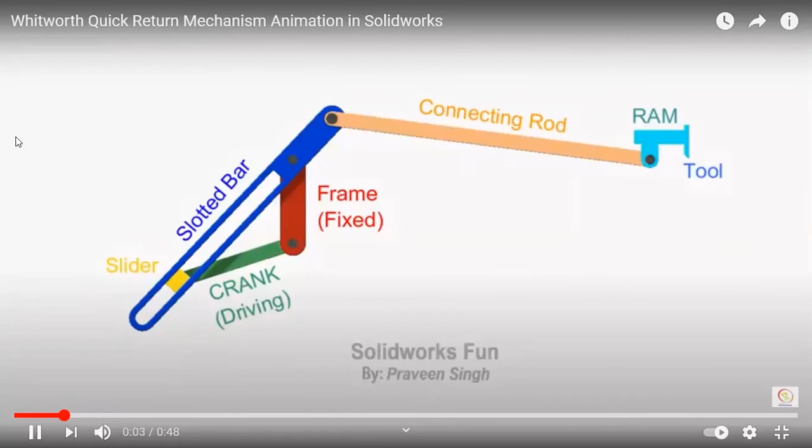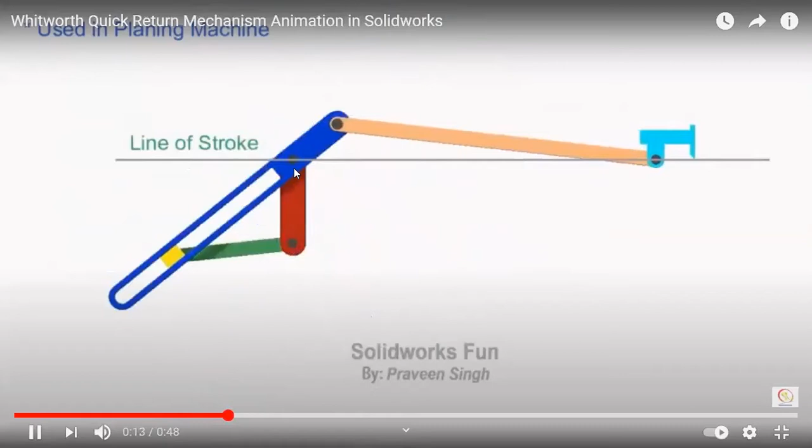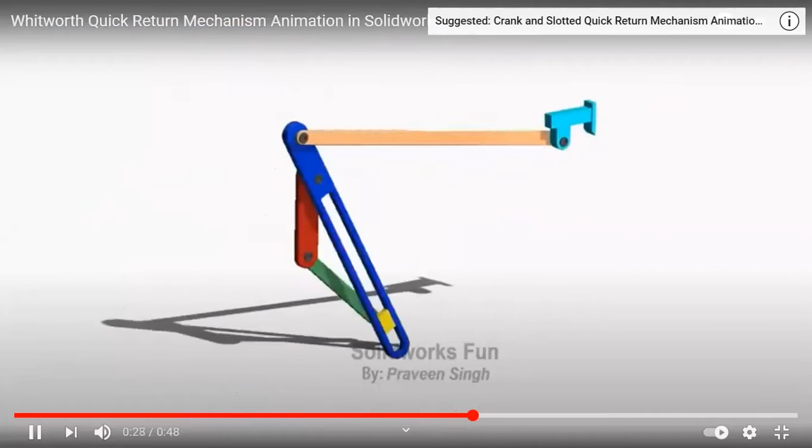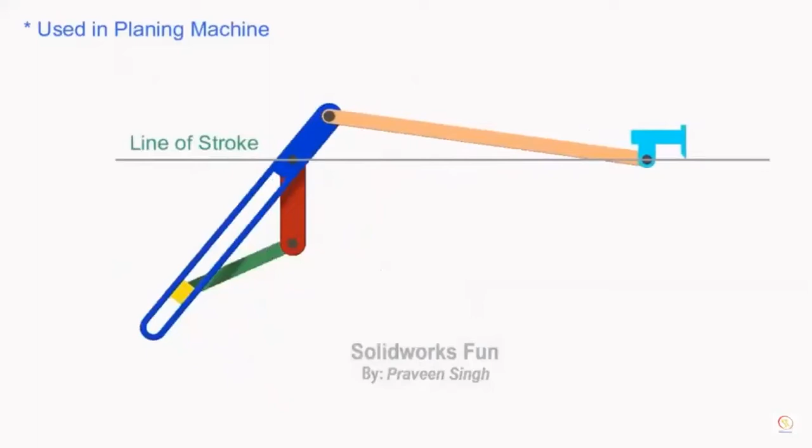You see how it's moving? The green one is the crank and the blue one is the slotted bar. When it moves forward, the tool is moving slowly, but when it comes back, it returns quickly. This is the specialized motion of the Whitworth quick return, that's why we call it a quick return mechanism. So we are going to study the kinematic diagram.

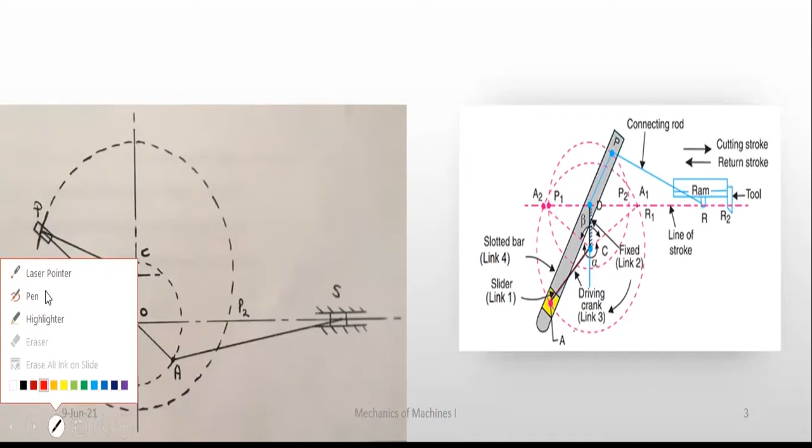On the right side, where my mouse is hovering, there are two pink circles, and on this side is the cutting tool. When the cutting tool moves in the right direction, we call it the cutting stroke. When the cutting tool moves in the left direction, we call it the return stroke. This is the connecting rod.

This is the connecting rod, and this one is the slotted link. Then the center C is the driving crank. This is the crank link. The gray one is the slotted link, and this one is the connecting rod. At the end of the crank, there is a piston moving along the slot. So this C is fixed.

C is fixed, and the slotted link is also fixed at point D. My red pointer shows D and C; these two points are fixed. On the left side of the figure, this one is C, similar to this C, and this O is the fixed D. Here they put D, but here they put O.

When the crank rotates at constant velocity, the end of the crank has to follow a path like this; there's no other way. Even though this piston moves along the slotted bar, it should move in a circle because the other end is fixed and it rotates at constant angular velocity. Also, point D is fixed.

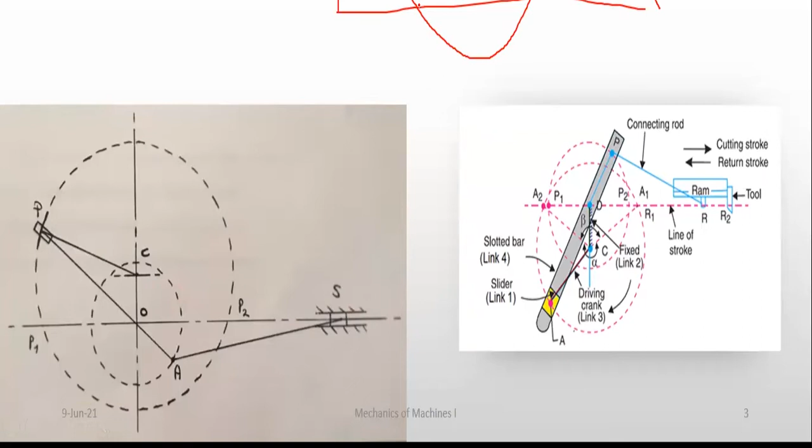Because of this special path, the piston also moves with this special motion. In the single slider crank, the velocity varies like this. For the Whitworth quick return, the forward stroke takes more time and the return is very quick.

This is the return. This is the forward. Because of this special arrangement of links, this piston is going to move like this. There's no equal time taken for the forward and reverse motion. The forward is going to take more time, the reverse is going to be less. That's why we use this specialized mechanism, the Whitworth quick return mechanism.

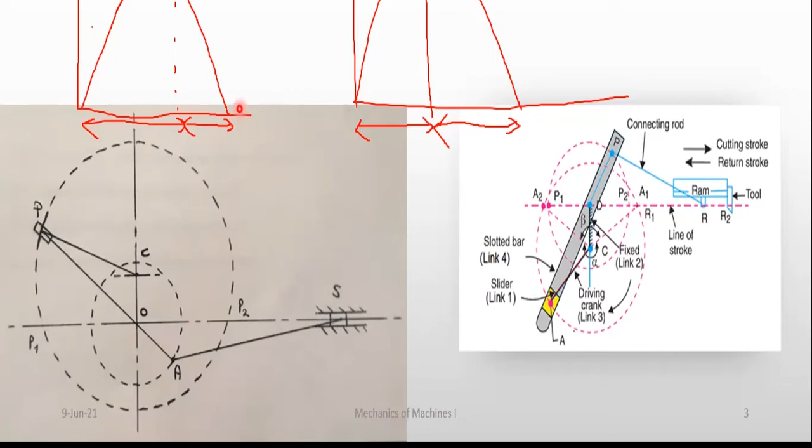This mechanism is mainly used in cutting tools. Normally when you cut metal or something, it's going to take more time. Then after cutting, it comes back to the original position quickly. Then again, it cuts slowly because you need some moderate speed to cut. You cannot cut the metal fast. So the forward takes a long time, and on return it quickly comes back.

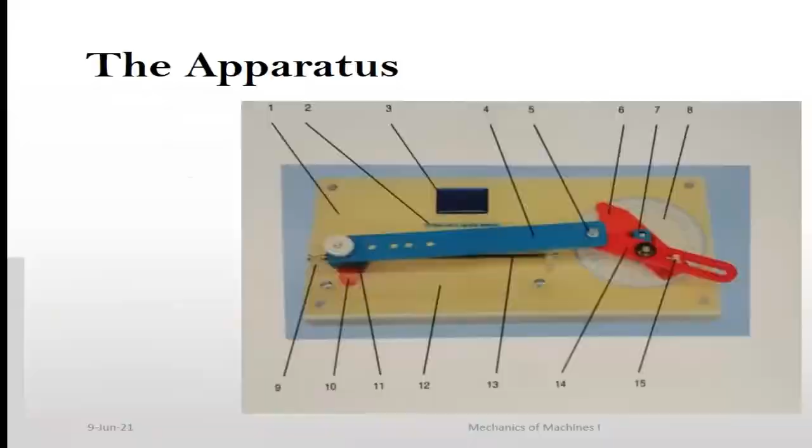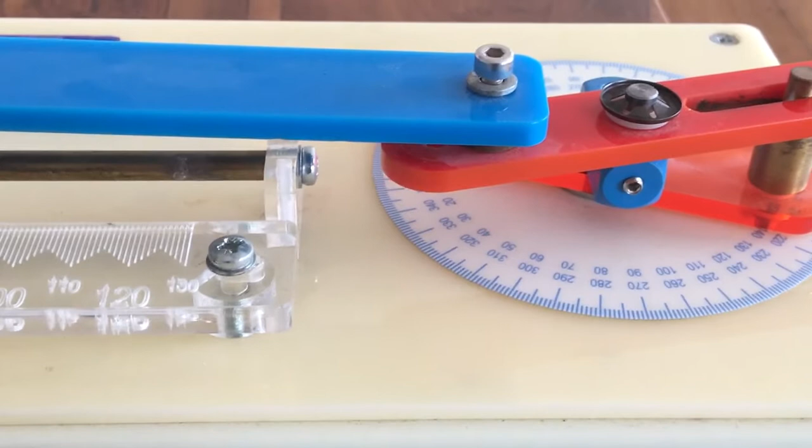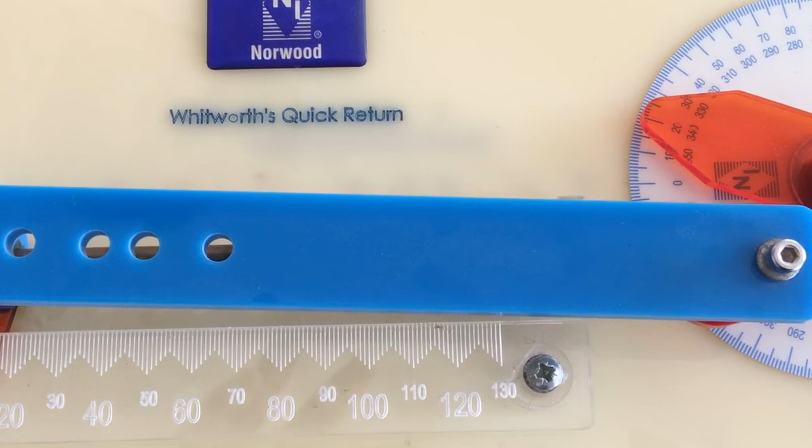Okay, this is our apparatus. This is a similar apparatus with a slight difference. I'm going to explain the main components of this apparatus. This is our apparatus for our practical. Before we get into doing the practical, we are supposed to know all the component names. Then it will be easy while we are doing the practical.

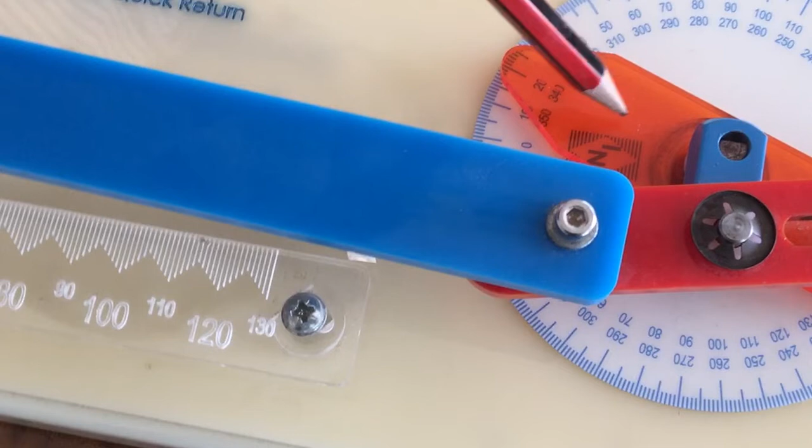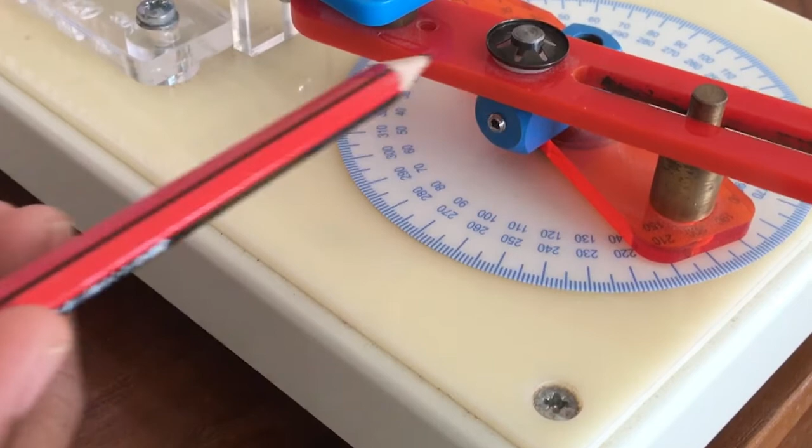Let's start. This orange color one is called the crank. You already know this from the practical of the slider crank mechanism, right? The long blue color rod is called the connecting rod. But this additional arm is called what? Slotted lever. This slotted lever is what's different from the slider crank mechanism. It's an additional arm fixed on this mechanism.

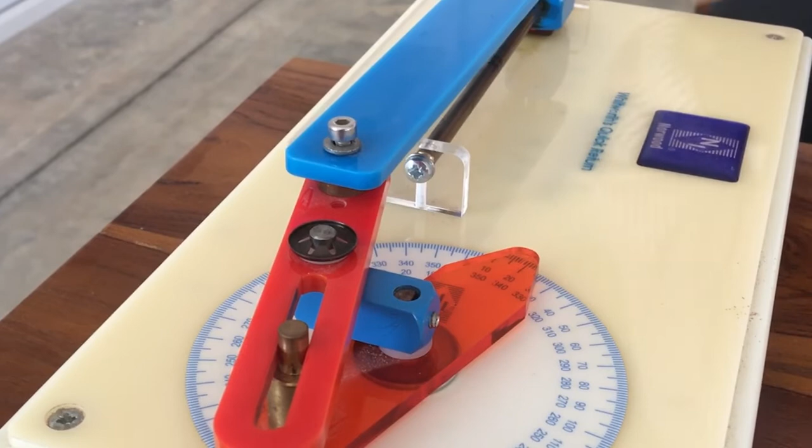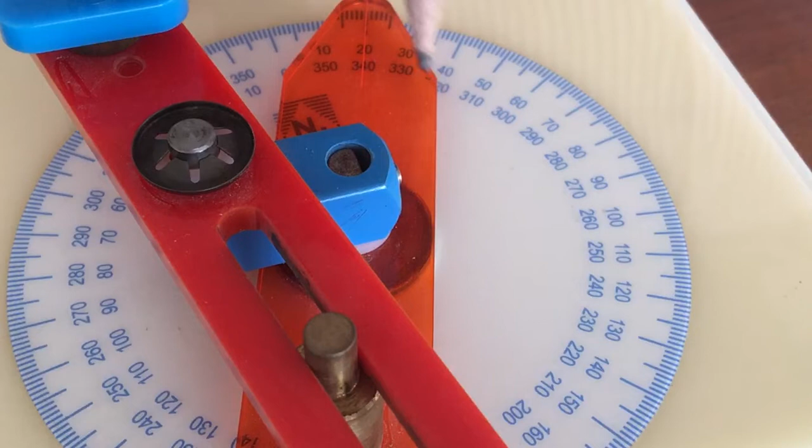That's why we call this mechanism the Whitworth quick return. So this is the slotted lever, this is the crank, this one is the connecting rod. Below this, the cube, this one is the piston. And there are two scales here. This one is a linear scale to measure the piston displacement, and the other is a circular scale to measure the crank position. Understand?

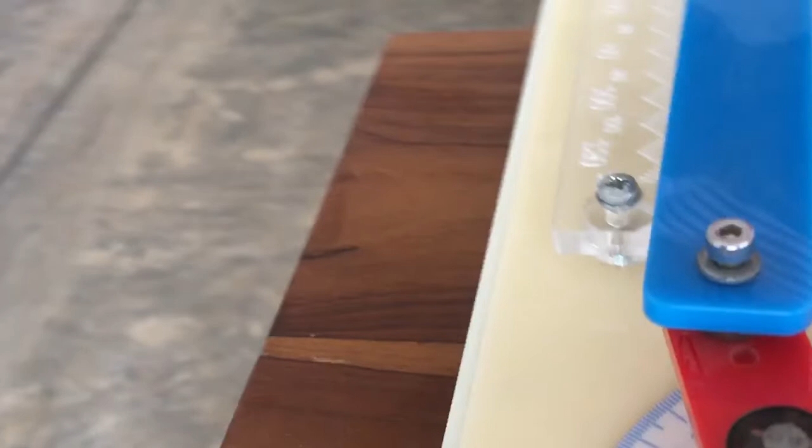What else can I show you? This one is the piston guide. There's a steel rod here, that's the piston guide. You see the piston is moving along the guide. While the crank is rotating, the piston is moving in linear motion. So these are the main components of our practical.

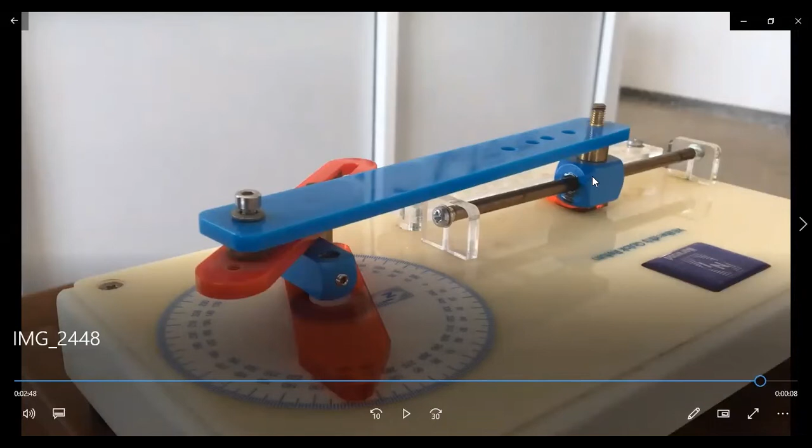Normally in real life you would see a cutting tool, but for our practical, instead of the cutting tool, we put this piston like a single slider crank chain. So we have this metal block, and we are going to study the motion of this piston. That is our practical aim. Our practical objective is to investigate the Whitworth quick return, by studying the motion of this piston.

This red one is the additional slot. This brass block is fixed at the end of the crank. So while the crank is rotating, this brass block will move along the slot as well. Clear? So this is our practical apparatus.

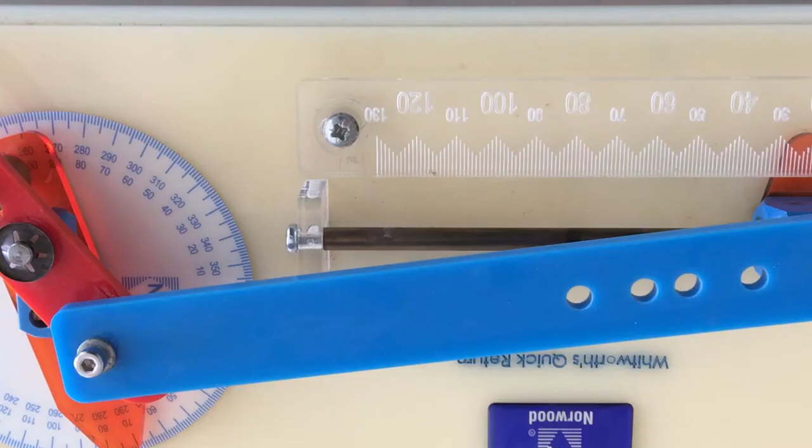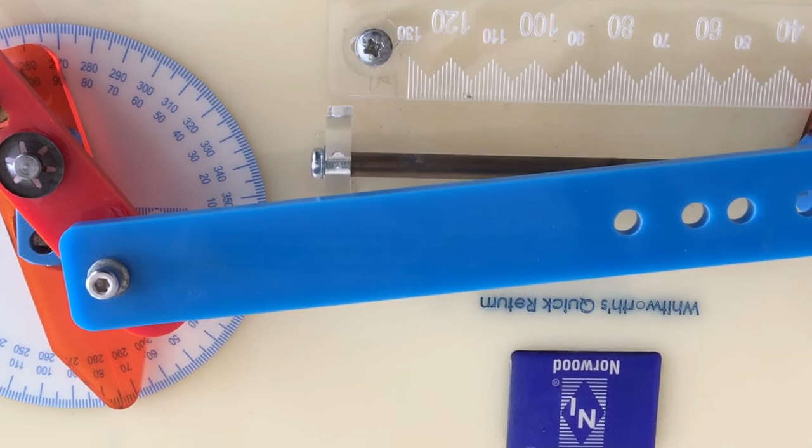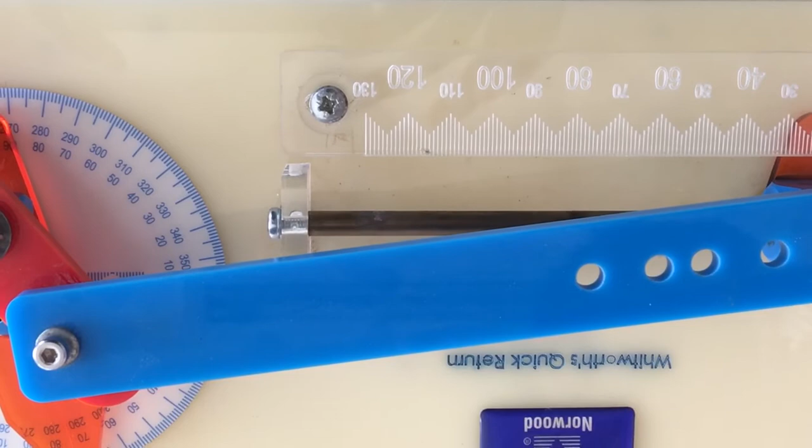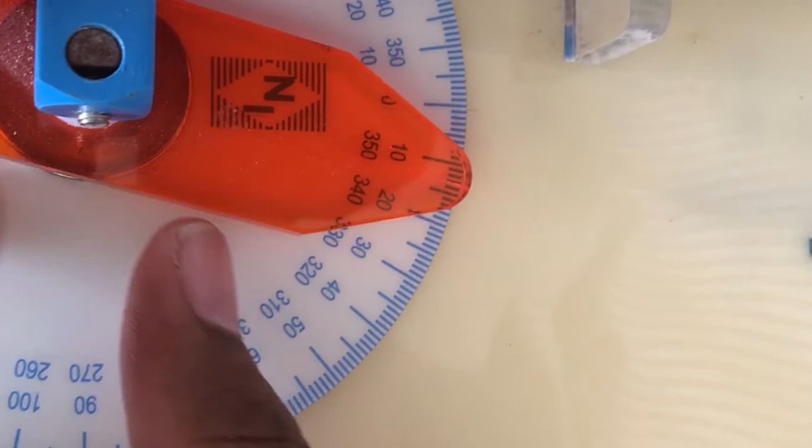Now we move into the procedure part. We take our lab sheet. What is the first step we have to do in the procedure? It says set the drive crank to 0 on the circular scale. So this is the crank, this is the circular scale, and we have to set the crank to 0 degrees. Now it's set. You see here the crank position is 0 degrees of rotation.

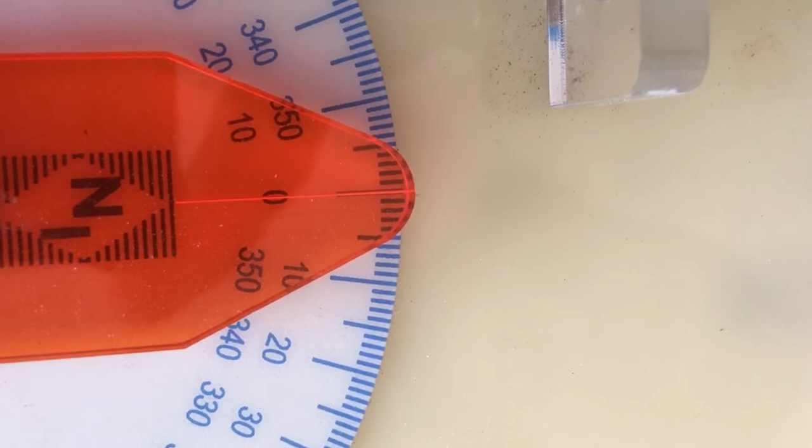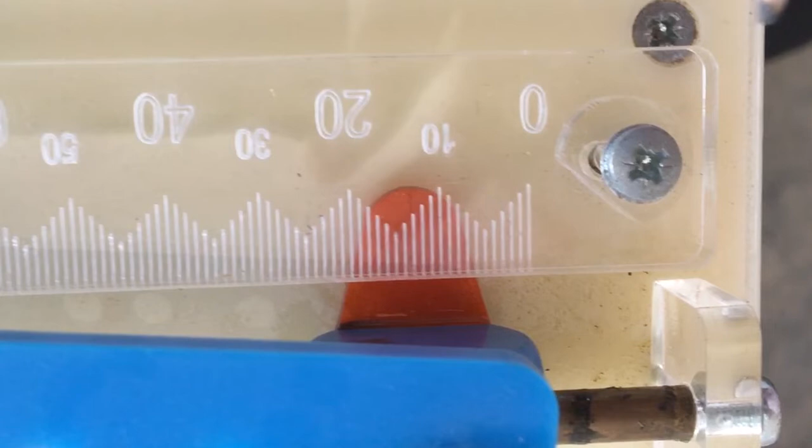At 0 degrees of rotation, what is the piston displacement? We have to read it on the linear scale, right? It's about how much? You see, 13 millimeters. So we have to note this down.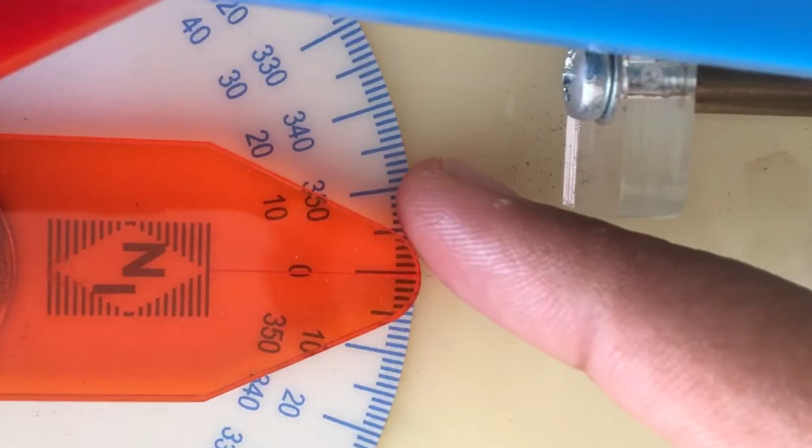For a 0 degree of rotation of crank, the piston displacement is 13 millimeter. Then what we have to do? Then for every 10 degree of crank rotation, note the slider displacement. Okay. Now we have to repeat this procedure for a 10 degree of rotation. We just move the crank to the 10 degree of rotation and take the reading of the piston displacement. Here see how much? Here 11 millimeter.

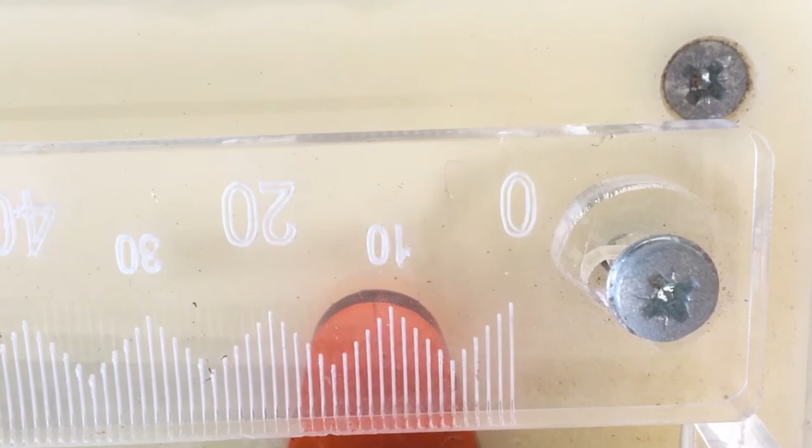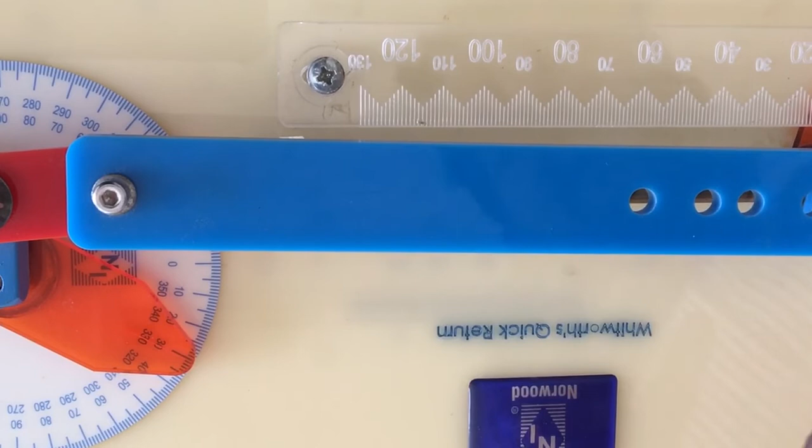So for a 10 degree of rotation, how much? 11 millimeter. Likewise, we have to repeat this procedure for every 10 degree of rotation. Like 20 degree of rotation, how much the piston displacement, and 30 degree of rotation, how much is the piston displacement. So likewise, we have to do the rotation until 360 degree. Okay, this is how we get the readings of the piston displacement versus crank rotation.

Zero angle displacement. Okay, for a zero angle displacement is 3, and 10 degree 1.5, 0.75 for 20 degree, 30 degree 0.25, 0.25, and 40 degree 0.25.

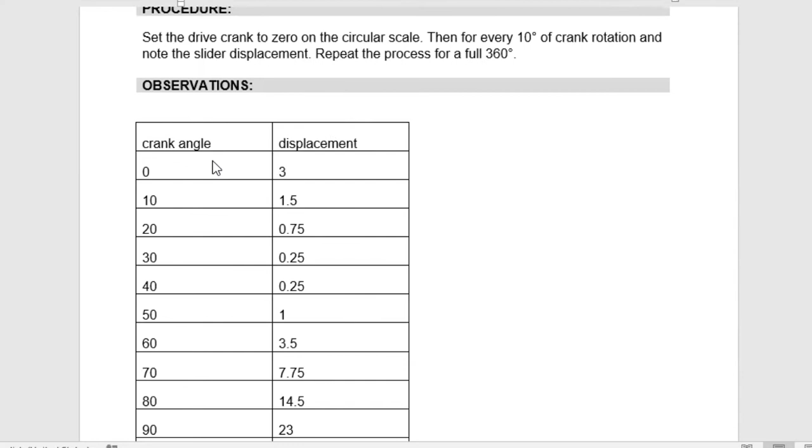Okay, now we move to the results part. First, what you have to do is plot a graph of displacement versus crank angle. Displacement on the y-axis, crank angle on the x-axis. Okay, so you have to draw the graph. This is your first task.

Second, the outer limit of the slider travel occurs at the crank angle of dash. That you have to find out from the graph. On the graph, you will see when the most outer limit will occur, at what crank angle. So after drawing the graph only, you can find out that one. From the graph you will see.

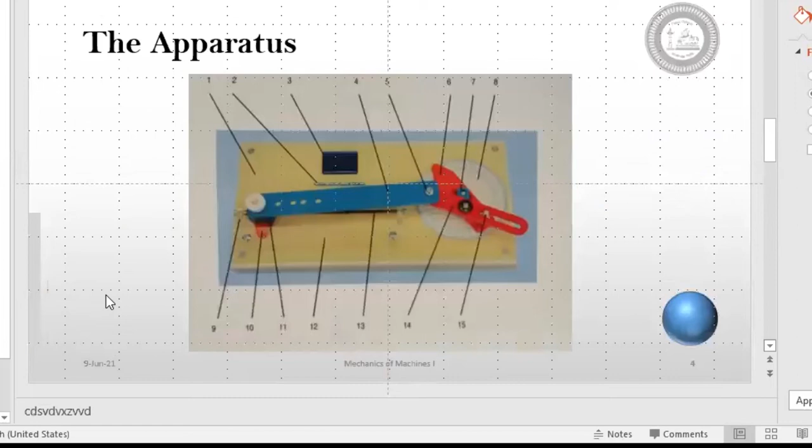From P1 to P2 is the forward motion of the cutting tool, forward motion of the slider. Then P2 to P1 is a return. You see, the P2 to P1 is shorter than this P1 to P2, right? Clear? So you have to find out what is the degree of the crank angle, this angle, to obtain the maximum outer slider. Normally it will occur here or here, depends on the direction of the rotation. Clear?

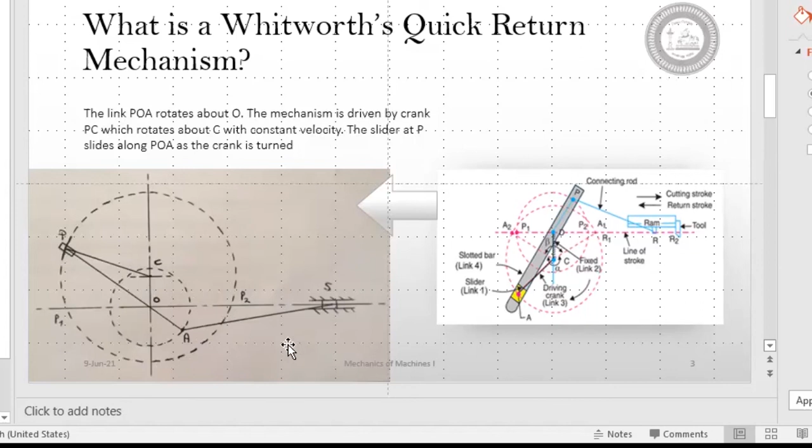You see, when you move like this, go down, that time this slider will move along this slot, right? And keep this distance the same throughout the path. So when you come here, the maximum distance will occur. You have to find out what is the degree of the crank position to get the outer limit. That is your second question. You have to find out from the graph.

Next is the inner limit of the slider travel occurs at crank angle of dash. That is the other P1 they are asking. One is the P2, another one is the P1. Outer limit and inner limit of the slider travel occur at which crank angle. That one you have to find out from the graph. After that, what is the percentage of the crank revolution when the return stroke occurs? You know the full revolution is 360.

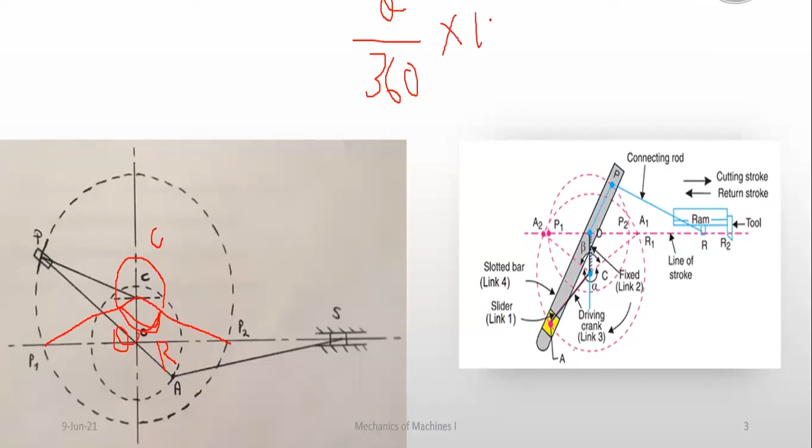Let's go to question number 4, the percentage of the crank revolution when return stroke occurs. So this is a return angle, right? This is the return, and this is the cutting stroke. The upper is cutting, below is return. So they are asking the percentage of this return angle. That means theta over 360. If you say theta, then theta over 360 into 100. So you know the percentage of the return angle. This is for question number 4.

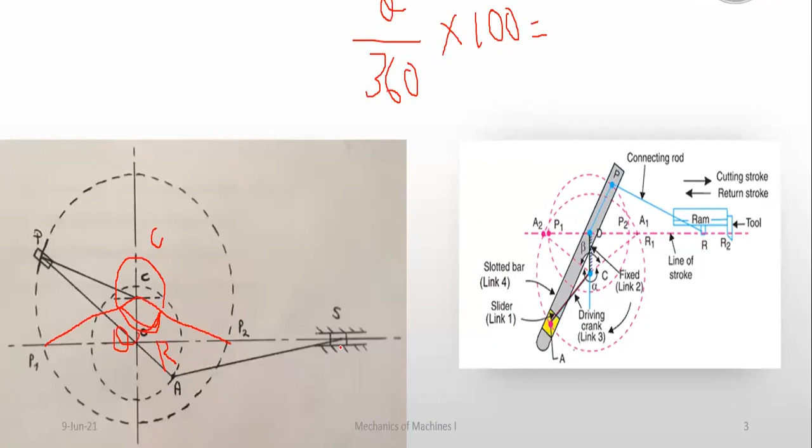Fifth question is, what is the percentage of a crank revolution when the cutting stroke occurs? Cutting stroke, as I mentioned, is the above, right? Normally 360 minus theta. But this reading doesn't start with 0, right? If you notice your observation values, it may start somewhere like this. So you have to find out exactly where the cutting stroke started and where the cutting stroke finished.